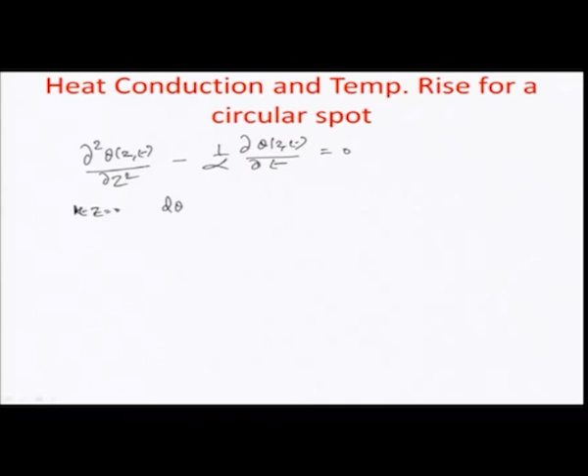We assumed boundary conditions that at the surface of the workpiece, corresponding to z equal to 0, there would be a constant temperature gradient with respect to the z direction, the depth, given by minus 1 by k, h, t. We further assumed the surface was semi-infinitely long, and that the thermal properties of the workpiece remain unchanged, assuming theta equal to 0 at time t equal to 0. This is actually the baseline temperature, the room temperature, about 24 degrees or so, but we assume that to be the baseline, so theta can be equated to 0 at time t equal to 0.

So assuming that, we arrived at a solution using conventional PDE methods, where theta(z,t) was represented by: twice h by k, root over alpha t by pi, exponential minus z square by 4 alpha t, minus z by 2, error function of the second kind, z by twice root alpha t.

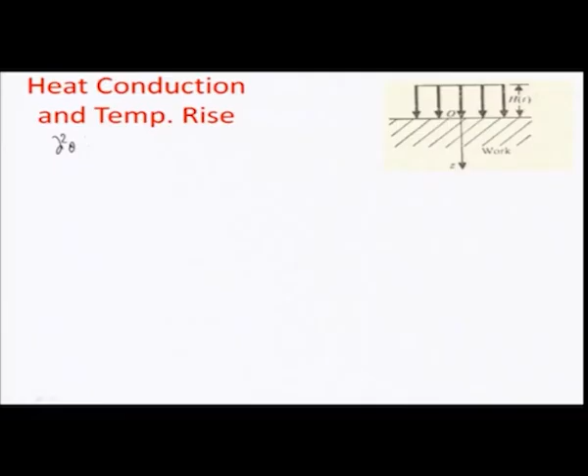So let us now work on a slightly different problem. We already have from before the equation: del squared theta(z,t) by dz squared, minus 1 by alpha times del theta(z,t) by del t, equal to 0.

We know that the boundary conditions on the surface become: theta(z, t=0) is 0, and del theta by del z, that means the gradient of temperature on the surface in the z direction, corresponding to z equal to 0 at some point of time t, is given by minus 1 by k times h(t), h(t) being the heat flux, which is actually constant and continuous on the surface.

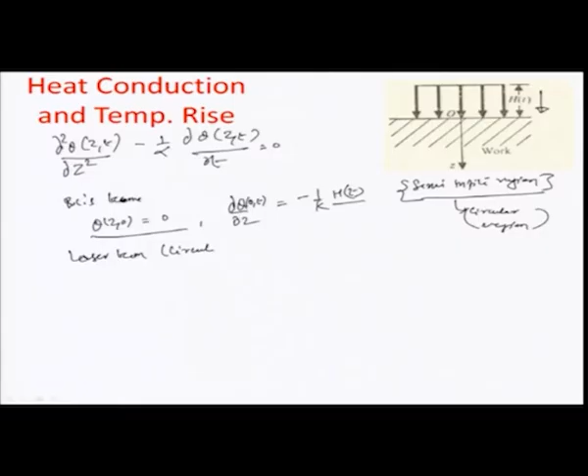And that is how a semi-infinite region being exposed to a laser beam can be modeled. We slightly change the connotation of the problem by converting this semi-infinite region into a circular region, meaning the beam now has a diameter d. So you have a laser beam, circular, of diameter d, and you want to try and see how you model this equation for a circular laser beam, which is more realistic and closer to the real world situation.

So here the boundary conditions have to be slightly tweaked because of that, and the new boundary conditions become: theta(z, t=0) is 0, because the laser beam is supposed to just start irradiating the surface at time t equal to 0, so the temperature is still the room temperature, the baseline temperature. The only other difference is that the gradient of temperature at the surface for all different points of time t now becomes a function of the beam diameter, and we can consider this to be minus h(t) by k, times pi d squared by 4.

So if we assume these to be the new boundary conditions, the solution that would emerge to this equation for a circular beam becomes: theta(z,t) equals twice h root of alpha t by k, times the error function of the third kind of z by twice root of alpha t,

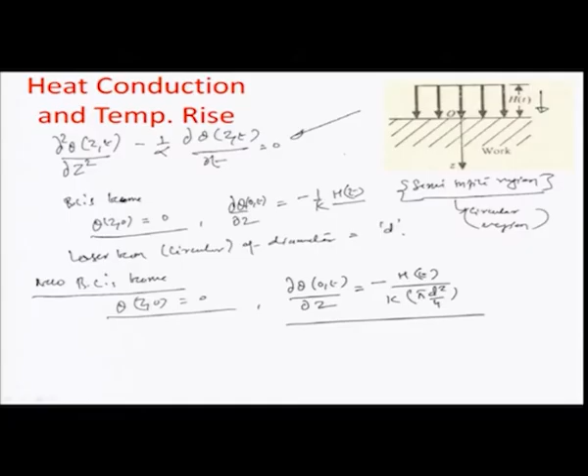If you recall from the earlier slide, when the heat flux is a step function, meaning the heat starts at time t equal to 0 at a constant heat flux h and continues for all points of time, the solution that came out involved the second kind, which is basically 1 minus the error function. We represent the error function in various ways to shorten the algebraic notation of the formulation.

So here, the same thing is done with a third kind, which is a slightly more complex form of what we had with error function 2, or the second type.

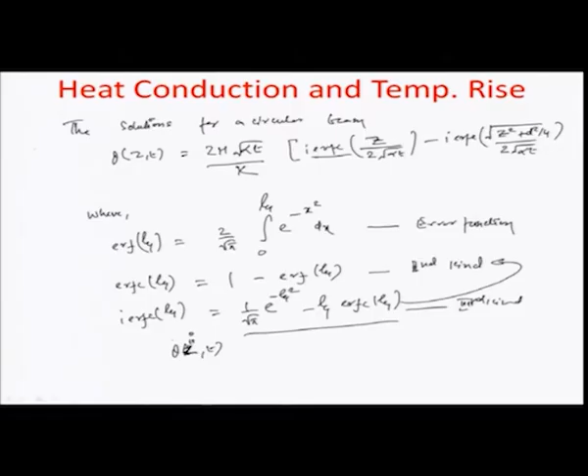In a nutshell, if we were to find the value of theta at z equal to 0 and for all points of time t, that means the temperature variation on the surface with exposure to the beam starting from time t equal to 0 onwards. It just amounts to putting the value of z to be 0 in this expression and trying to find out how it would behave.

So the value of the error function of the third kind, IERFC zeta, for zeta equal to z by twice root of alpha t, as we assumed earlier in this coefficient, right here, that is what the zeta value is. This becomes simply 1 by root of pi, times e to the power of 0 minus 0, error function of zeta equal to 0. So this is simply 1 by root pi.

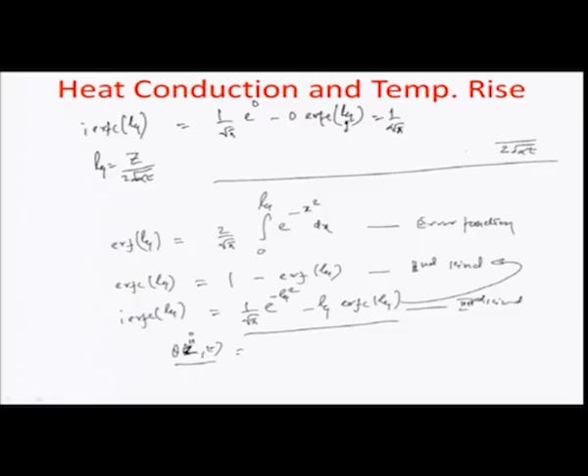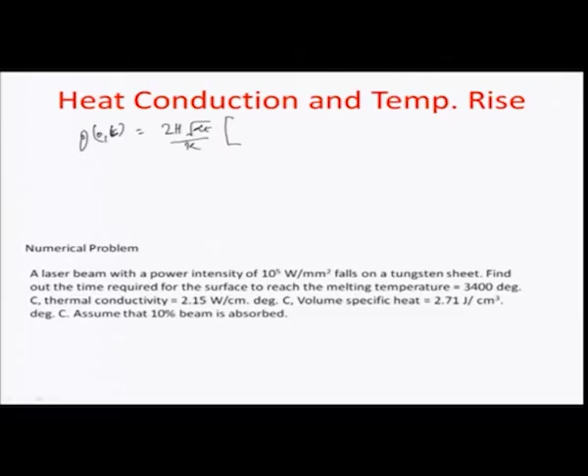If we substitute this value in the equation for the temperature on the surface, theta 0 for all points of time, theta 0 t, it essentially boils down to this. Let us write the whole expression: twice h alpha t by k, times the error function of third kind z by twice root of alpha t, minus the error function of third kind root of z squared plus d squared by 4, by twice root of alpha t, corresponding to z equal to 0.

This further becomes equal to 1 by root pi, as we just derived, minus IERFC, the error function of the third kind, and the z goes away here, so it's basically d by 4 root of alpha t. That is essentially how the temperature variation on the surface of the machined workpiece as a function of time can be represented.

So if you know the beam diameter, in this case d, and you know the material properties like K and alpha, and you also know the coupled heat flux, which is assumed to be a step function starting at time t equal to 0 with a finite heat flux H over all points of time, then the surface temperature theta as a function of time can be equated to the melting point of the workpiece material. You can get a good estimate of the machining time based on this formulation. Let us call it equation 1.

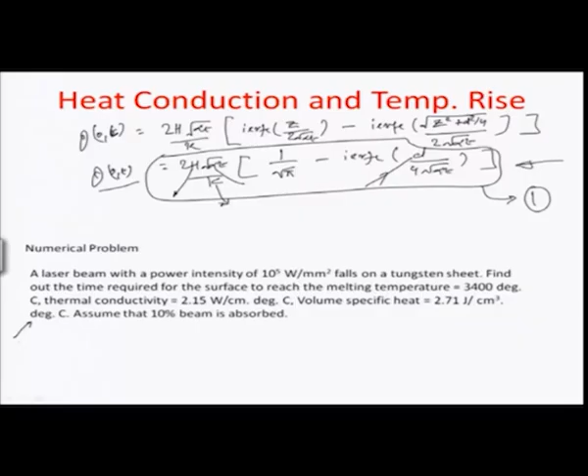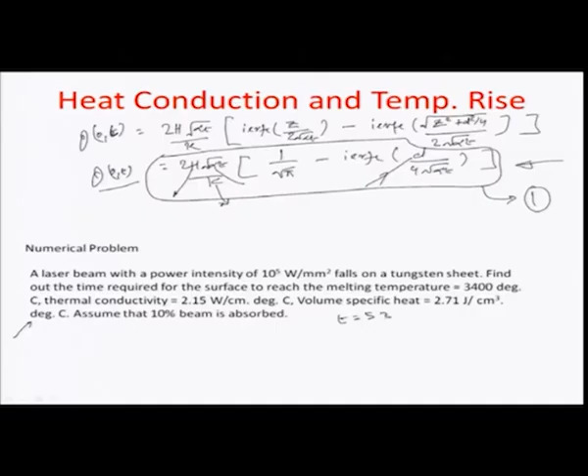Let us now slightly change this problem. Earlier, assuming the workpiece to be a semi-infinite region, we found the time of machining was a very small value, about 53 microseconds. Now, if we change the beam from interacting with a semi-infinite region to a circular beam of diameter d, how would the whole time get modified? Let us have a clear look at it.

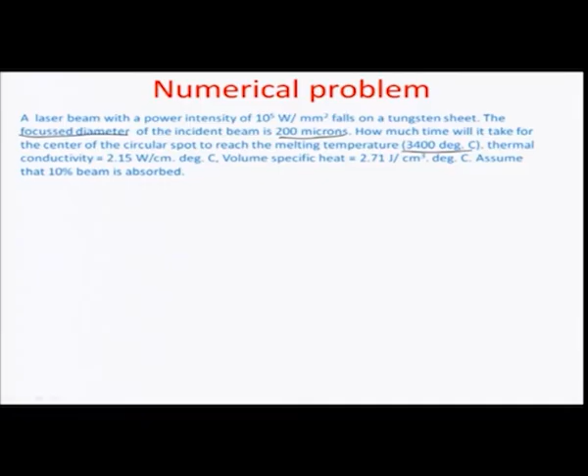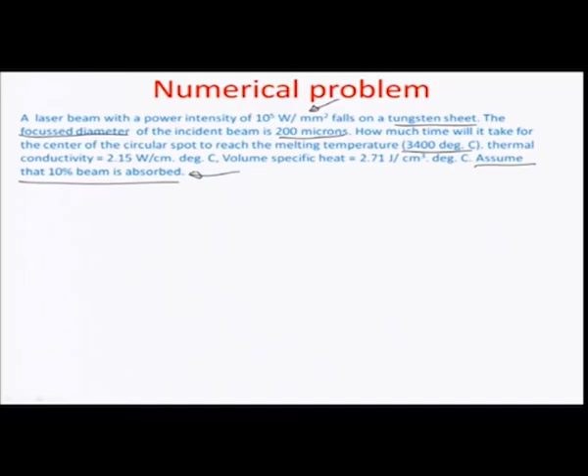In this case we have tweaked the problem slightly. You have a focused beam of diameter 200 microns, with remaining conditions the same: the workpiece is tungsten sheet, power intensity about 10 to the power 5 watts per millimeter square, 10% absorption with the remaining 90% reflected off the surface, and other properties like thermal conductivity and volume specific heat given for tungsten sheet. It's the same problem, but now the beam is a circular beam of diameter 200 microns instead of semi-infinite. Let us see the difference in machining time for both cases.

Let us write the complete equation for the temperature theta 0 t equals theta m. In this case, that is 3400 degrees Celsius, and this can be equated to twice h root of alpha t by k, times 1 by root of pi, minus IERFC, the error function of the third kind, d by 4 root of alpha t.

We plug in the various values here. For example, h in this particular case is 10% of 10 to the power of 5 watts per millimeter square. Amount of power which is coupled comes out to be 10 to the power 4 watts per millimeter square.

We have K in this particular case as 2.15 watt per centimeter degrees Celsius. Volume specific heat rho c is 2.71 joule per centimeter cube, and this is K, thermal conductivity, making the thermal diffusivity alpha, the ratio of K by rho c, 2.15 by 2.71. This comes out to be about 0.79 centimeters square per second.

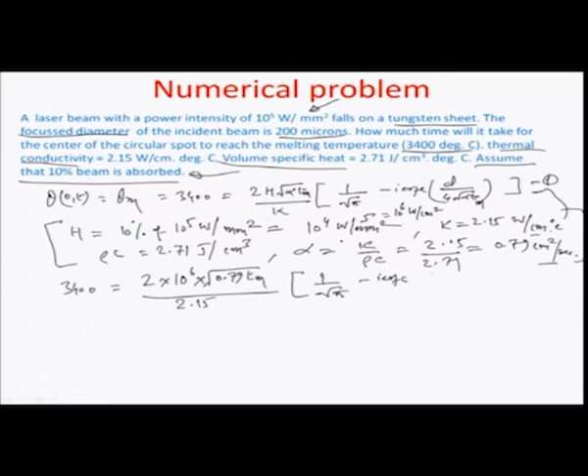0.79 centimeter square per second times Tm, the value of the machining time, divided by K, which is 2.15 watts per centimeter degree Celsius, times 1 by root of pi minus the error function of the third kind of this whole term.

So let us convert this 200 microns into centimeters. This comes out to be 200 times 10 to the power of minus 6, that is about 2 times 10 to the power of minus 4 meter, or about 0.02 centimeters.

This can be divided by the term 4 root of again 0.79 Tm. Let us call this value beta, root of 0.79 Tm, and we try to calculate the value for beta from this particular equation here.

So the first thing we need to do is put the beta value right in this equation here, and we can rewrite this equation as 3400 equals - this whole thing can be calculated and written down as 9.30 times 10 to the power of 5 times beta, this is the beta value, times 1 by root of pi minus on the error function of the third kind of this whole term here, which we call zeta.

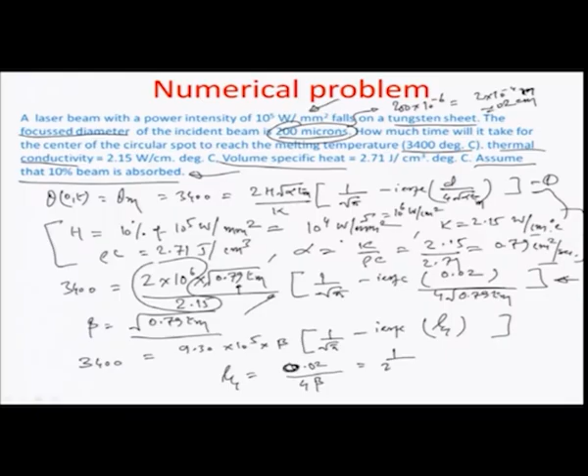So therefore, as you can rightly see here, zeta is basically nothing but 0.02 - let us just write this thing here. So 0.02 by 4 times beta, which makes it equal to 1 by 200 beta. That is how zeta can be classified.

So in summary, beta has been estimated as root of 0.79 time of machining Tm, and zeta, the new parameter here, is 1 by 200 beta. And we can write down this equation.

As you already know, the error function of the third kind of a parameter zeta can be represented as 1 by root of pi, e to the power of minus zeta square, minus zeta, complementary error function of zeta. Here the zeta value of course is 1 by 200 beta.

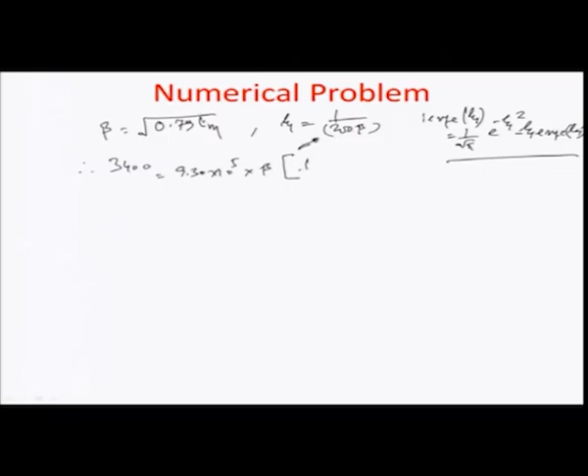So we can have this represented as 3400 equals 9.3 times 10 to the power of 5 times beta, times 1 by root of pi minus 1 by root of pi exponential to the power of minus zeta square, plus zeta times 1 minus error function of zeta.

That is how you can represent 3400, and you already know that the error function of zeta is actually twice by root pi, integral 0 to zeta, e to the power of minus x square dx.

This is a numerical integral, and so you have standard tables calculating the error function as the area under the curve of e to the power of minus x square with respect to x, and for different zeta values, ranging between 0 and different real values of zeta, you have different error function values.

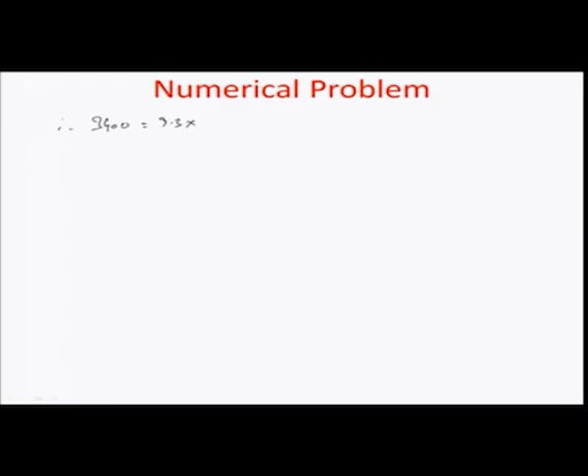In this particular case, using the table and the numerical integration value, the solution of this equation: 3400 equals 9.3 times 10 to the power of 5 times beta, times 1 by root of pi minus 1 by root of pi e to the power of minus zeta square, plus zeta times of 1 minus twice by root of pi integral 0 to zeta e to the power of minus zeta square d zeta.

This comes out to be corresponding to a zeta value of 0.5, a beta of 0.01, and a time of machining of 0.00013 seconds. So, the time of machining in this particular case, as you can see, is very small in comparison to, sorry, very large in comparison to the time of machining which was earlier for a semi infinite region, for obvious reasons that you are trying to reduce the beam area from a semi infinite interaction with the workpiece to almost a small value of the diameter d equal to 200 microns. So, therefore, more time would be needed for this machining to happen because of heat losses across the beam boundary to the remaining part of the solid.

So, we will just see the effect of power intensity. Let us suppose the power intensity in this particular case, H, is very high. Of course, because of a higher H, the Tm should reduce, and if the Tm reduces, then you have this value of zeta here, which has been estimated to be 1 by 200 beta root of 0.79 Tm. So, as the Tm reduces, the zeta value goes up.

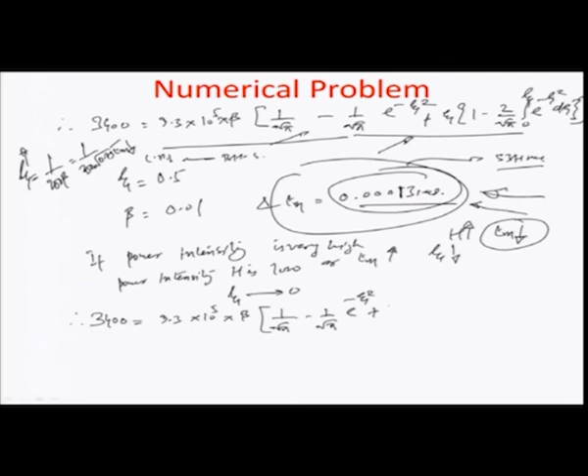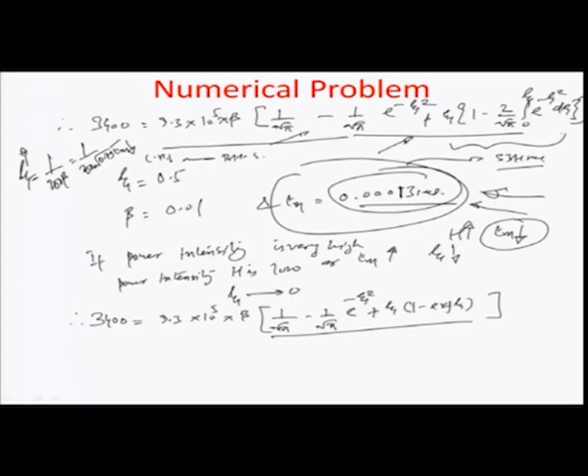3400 equals 9.3 times 10 to the power of 5 times beta, times 1 by root of pi minus 1 by root of pi e to the power of minus zeta square, times zeta, plus zeta times of 1 minus error function of zeta. That is what this term is corresponding to in this particular case. So, if zeta is going to 0, then this term goes to 1, and effectively we are having a zeta value here, which is d by 4 root of alpha t, as we have already cited before. And of course, it is small, but then we just want to find out, because there is a smaller term which is here, which is also beta. Let us find the overall effect on this equation because of that.

So, one thing is that if this goes to 1, corresponding to zeta tending to 0, these two terms by pi cancel with each other, and we are left with 9.3 times 10 to the power of 5 times beta times zeta, and let us write the value of zeta here.

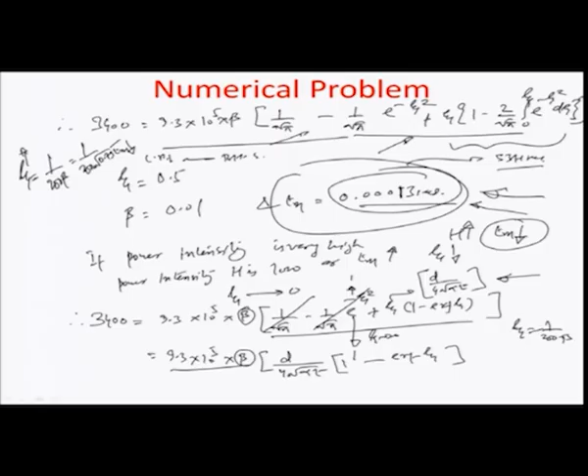Zeta is d by 4 root of alpha t, on the surface corresponding to z equal to 0, times 1 minus the error function of zeta. Zeta, as seen before, is 1 by 200 beta. So if we put this whole expression back in place, we can see how this equation would change. We have theta on the surface at z equal to 0, as a function of time t, equal to twice h root of alpha t, divided by k, times d by 4 root alpha t, times 1 minus the error function of zeta, where zeta is d by 4 root alpha t.

As we already know, here this root alpha t goes away, and we are left with h d by twice k, times 1 minus the error function of zeta, and that is equal to the surface temperature as a function of time.

If supposing the value of this error function, d by root of 4 alpha Tm, tends to 0 — and if you look into this table, you'll find the reason, as x tends to 0 the error function tends to 0 — we are talking about a typical zeta value between 0.2 and 0.

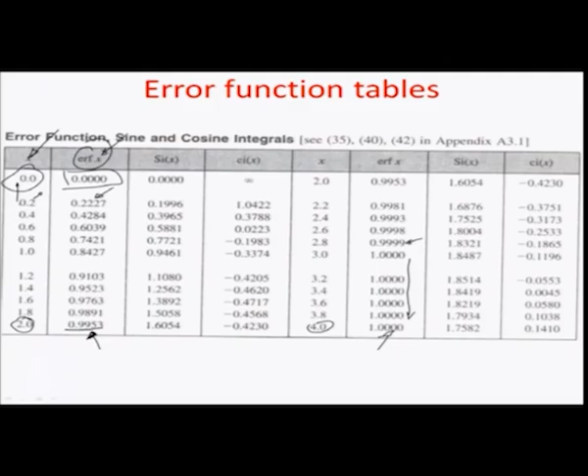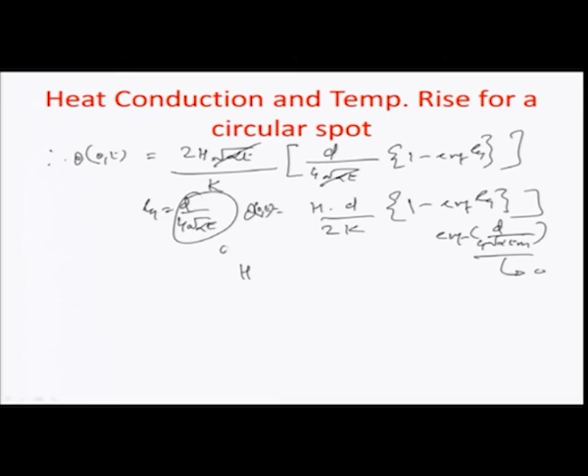In that event, the expression changes to the simple formulation for the total power needed so that only the minimum possible melting temperature is hit upon. Let us say this is equal to theta m. So h d by 2k is typically theta m, and in other words, the power needed, called the critical power — enough for the melting temperature to be reached — is represented simply by twice k theta m by d.

D is the beam diameter, and these are simplistic assumptions for a machinist, where you assume the d value is in microns, and this argument d by 4 root of Tm tends to be between 0.2 and 0. So the critical power needed for the temperature to reach the melting point of the workpiece is represented by HCR equal to twice theta m k by d.

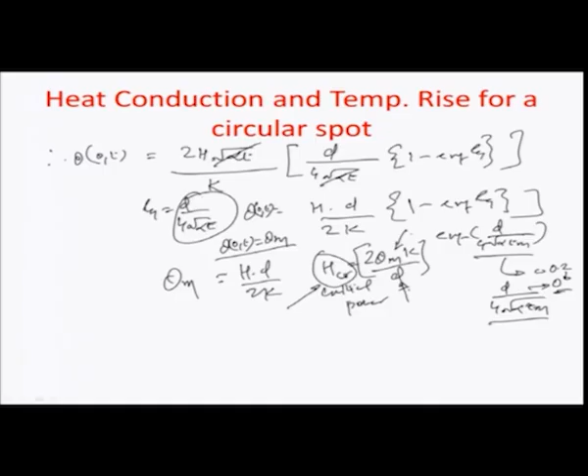Having said that, we can solve a small numerical problem where we try to find the value of the critical power for a laser machining system. Let us say the diameter of the beam is 200 microns, and we assume the same tungsten workpiece, meaning the thermal conductivity and thermal diffusivity remain similar to what we took earlier, and we assume 10% of the beam is absorbed, 90% is reflected.

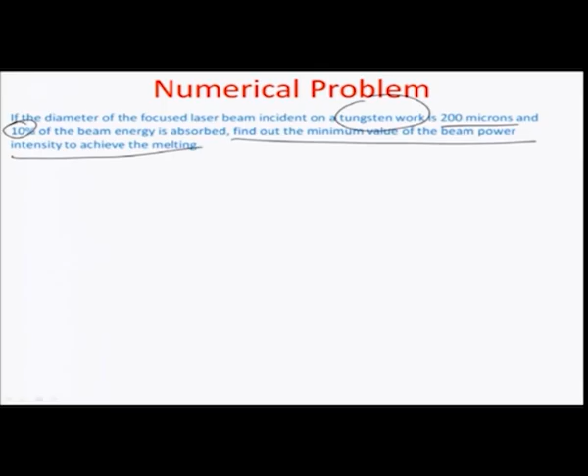So we need to find the critical value of the beam power, and see what kind of power values would be hit upon in this case. We already know that HCR, critical power, is represented as twice k theta m by d. Theta m is the melting temperature of tungsten, about 3400 degrees Celsius. We already know the k value as defined earlier, 2.15 watt per centimeter degree Celsius, the thermal conductivity of the tungsten workpiece.

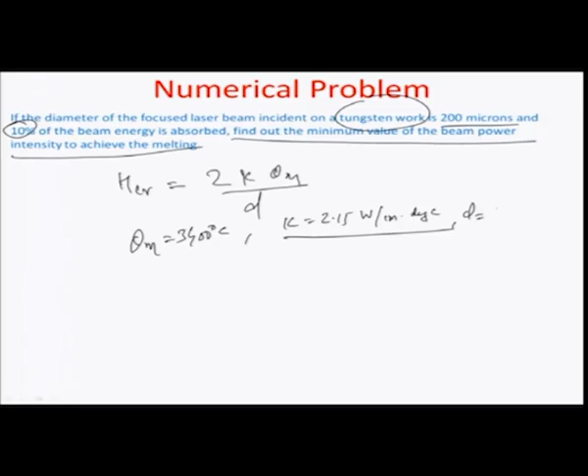The beam diameter is 200 microns, let us put it in centimeters as 0.02 centimeters. So we get the critical power HCR equal to twice 2.15 times 3400 by 0.02, which comes out to be 7.37 times 10 to the power of 5 watt per centimeter square. We already know only 10% of the beam power is coupled to the system, so we are left with 7.37 times 10 to the power of 6 watt per centimeter square as the incident power for just reaching the melting point of tungsten on the surface because of the beam-matter interaction.

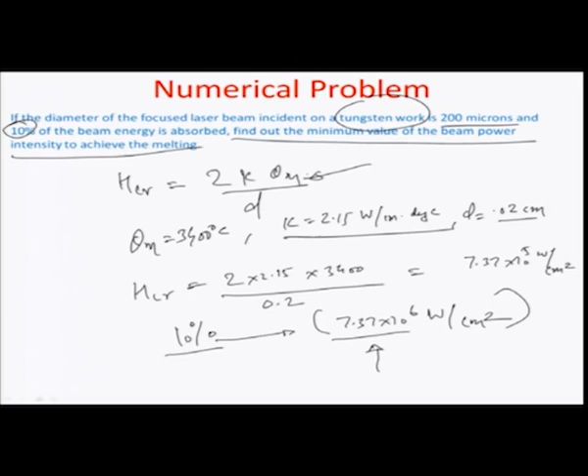So, I think we have come to the end of today's lecture. In the next session, I would like to do this problem for steady state drilling operation, where a through hole is generated within a workpiece, and then how the cylindrical periphery of the drilled hole results in heat transfer from the center, which is at the highest temperature, outwards. Therefore the time of machining and some criticalities would change in that model, and following that we would look into some application areas for these different machining processes for microsystems design and fabrication. Thank you.